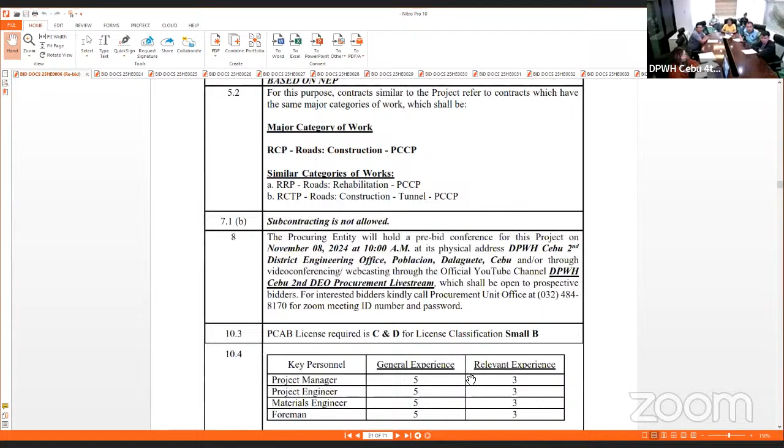And also the requirements of key personnel, general experience and relevant experience. Also the requirements of project engineer in compliance to DO number 118 series of 2024, and also the requirements of accredited materials engineer in compliance to DO number 98 series of 2016.

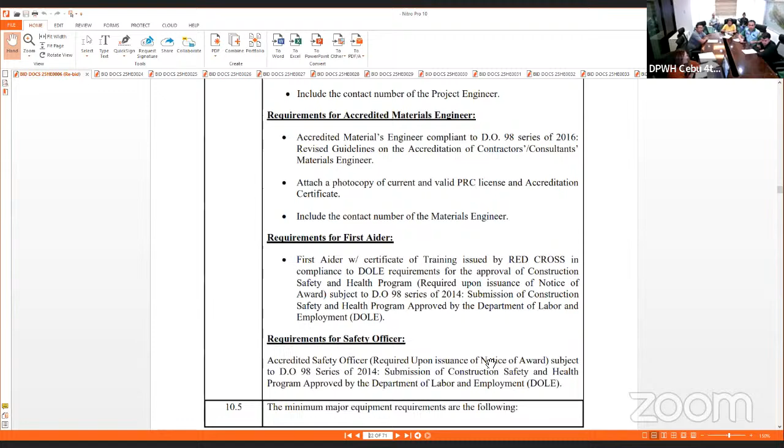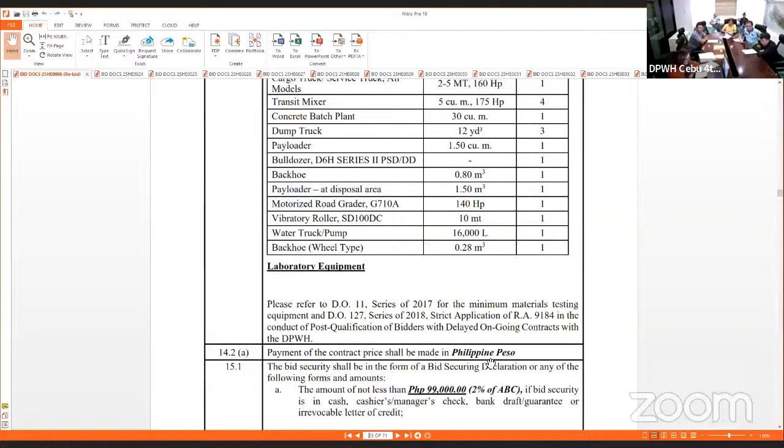Also take note the requirement of equipment, major equipment requirements and its capacity and number of units. Kindly refer to the shared screen.

The bid security shall be in the form of bid securing declaration or any of the following forms and amounts, as shown in the screen. Please refer to the shared screen.

The intended completion date is 32 calendar days, including predetermined unworkable day of 1 day and 4 numbers of Sundays.

For the bill of quantities, kindly refer to the shared screen, please.

For the next contract, ID 25 HE0024, Organizational Outcome 2, Protect Lives and Properties Against Major Floods and Flood Management Program, construction maintenance of flood mitigation structures and drainage systems, construction of Cawayan River flood control structure, Dalaguete, Cebu.

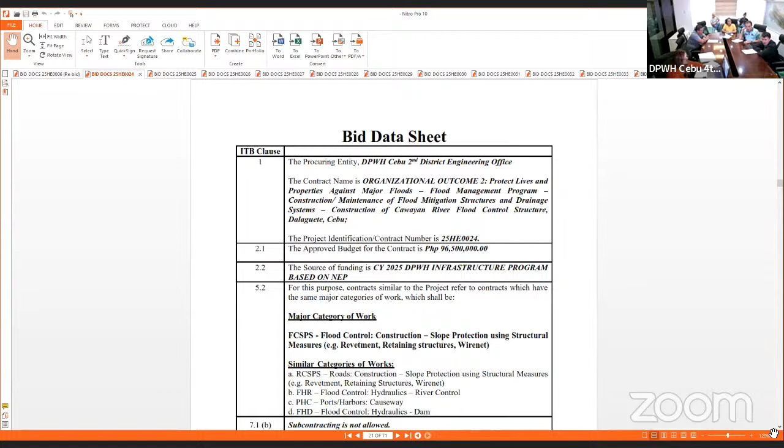For the major categories of work and similar categories of work, kindly refer to the shared screen. And its

key personnel requirements, general experience, and relevant experience. Also the requirement for accredited project engineers in compliance to DO number 118 series of 2024, and the requirement for accredited materials engineer in compliance to DO number 98 series of 2016.

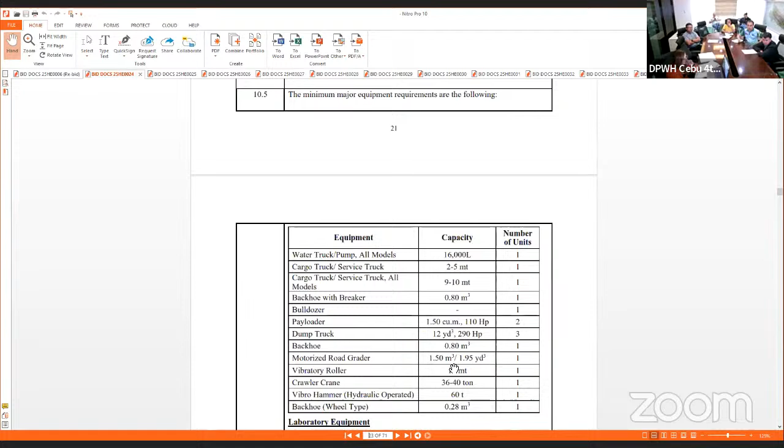Also, the major equipment requirements, capacity, and its number of units can be referred to the shared screen.

The bid security shall be in the form of bid securing declaration or any of the following forms and amounts as shown on the screen. Please refer.

The intended completion date is 288 calendar days, including predetermined unworkable days of 9 calendar days and 36 number of Sundays.

For the bill of quantities, kindly refer to the shared screen.

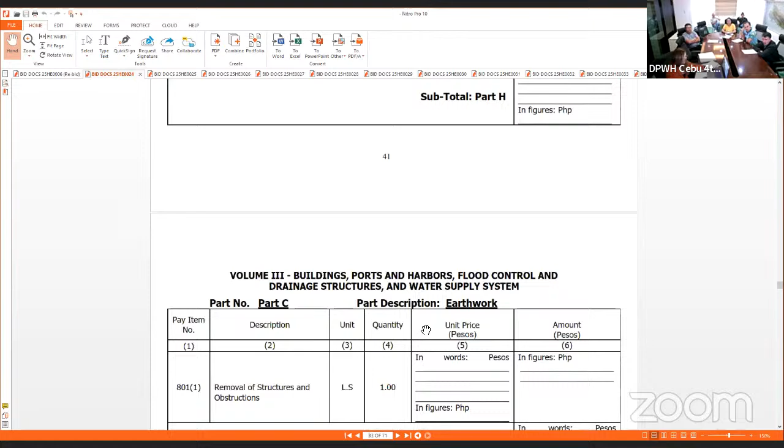For the next contract, 25 HE0025, Convergence and Special Support Program, Basic Infrastructure Program, BIP, Multipurpose Buildings, Facilities to Support Social Services, Construction, Completion of Multipurpose Buildings, Sitio BLISS, Barangay Binlod, Argao, Cebu.

For the major categories of work, similar categories of work, kindly refer to the shared screen.

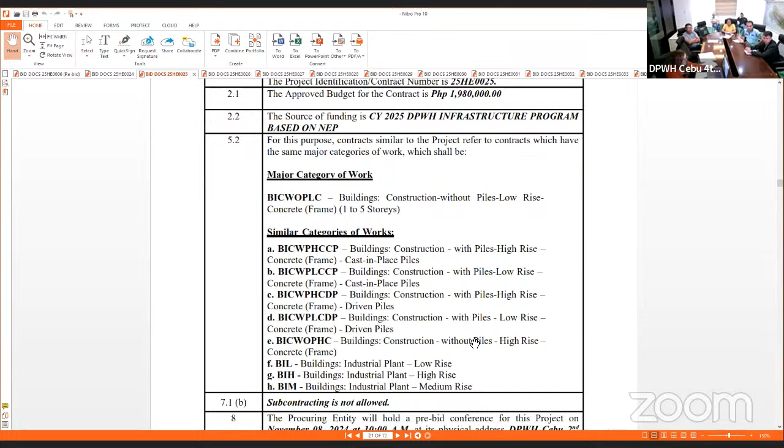The key personnel requirements, general experience, and relevant experience can be referred to the shared screen. The requirement for the accredited project engineer in compliance to DO number 118 series of 2024, and also the requirements for accredited materials engineer in compliance to DO number 98 series of 2016.

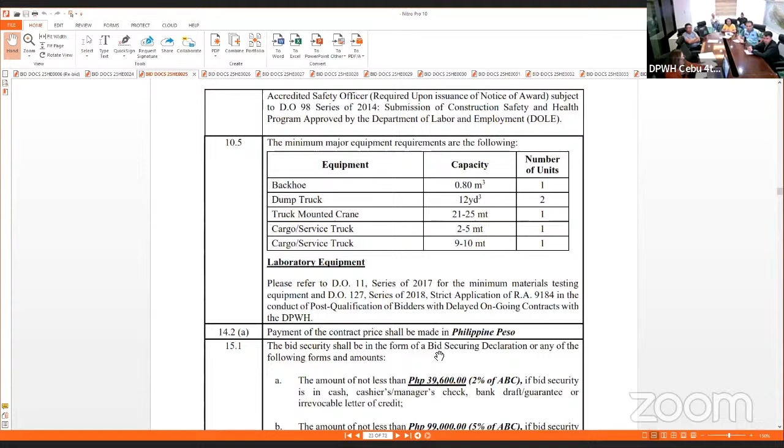Also, the major equipment requirements, capacity, and its number of units can kindly refer to the shared screen.

The bid security shall be in the form of bid securing declaration or any of the following forms and amounts as shown on the screen. Please refer.

The intended completion date is 90 calendar days, including predetermined unworkable days of 3 calendar days and 12 number of Sundays.

For the bill of quantities, kindly refer to the shared screen.

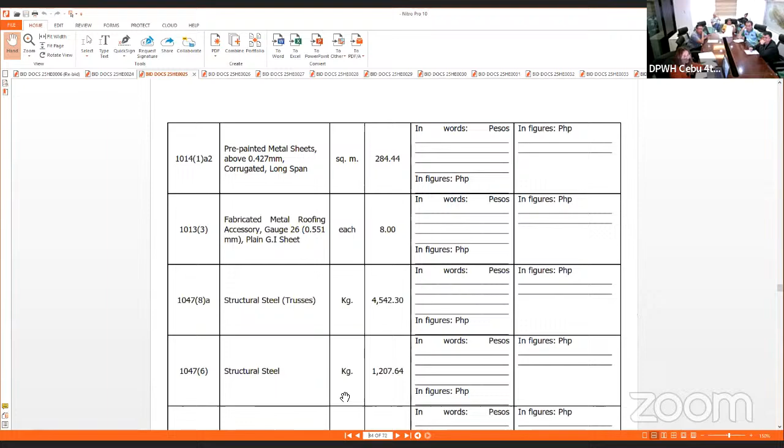For the next contract, 25HE0026, Convergence and Special Support Program, Basic Infrastructure Program, BIP, Multipurpose Buildings, Facilities to support social services, construction and completion of multipurpose building, Barangay Tulang, Argao, Cebu. For the major categories of work and similar categories of work, kindly refer to the shared screen.

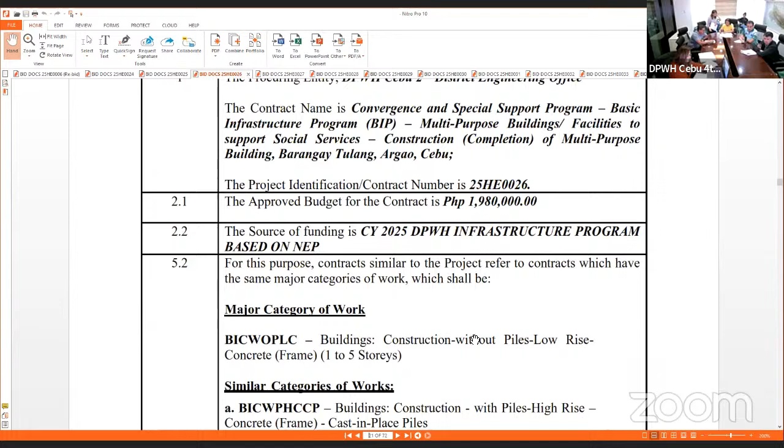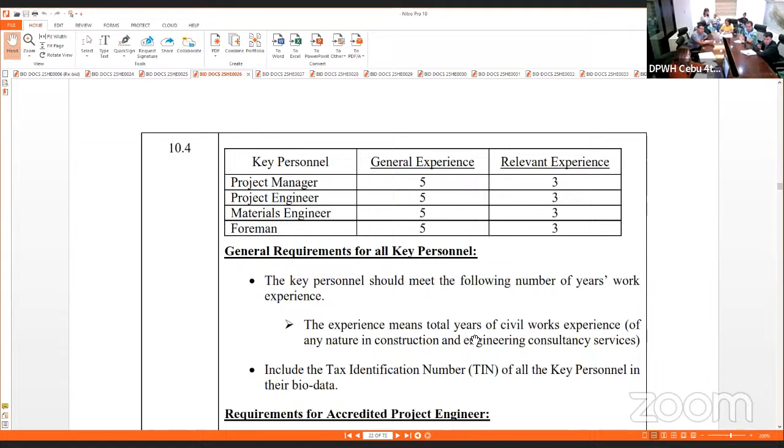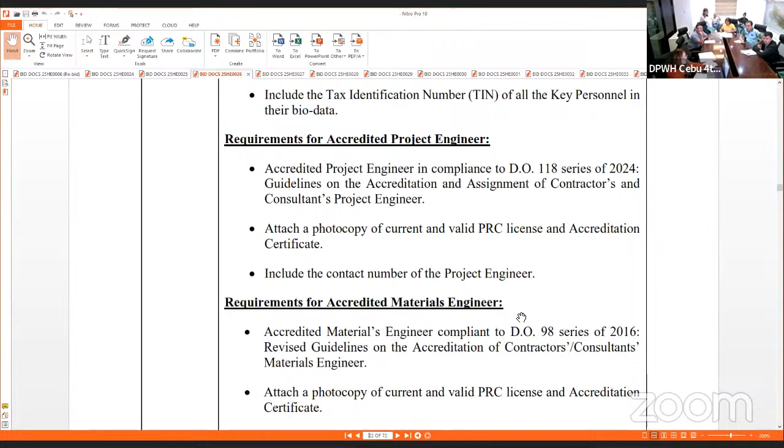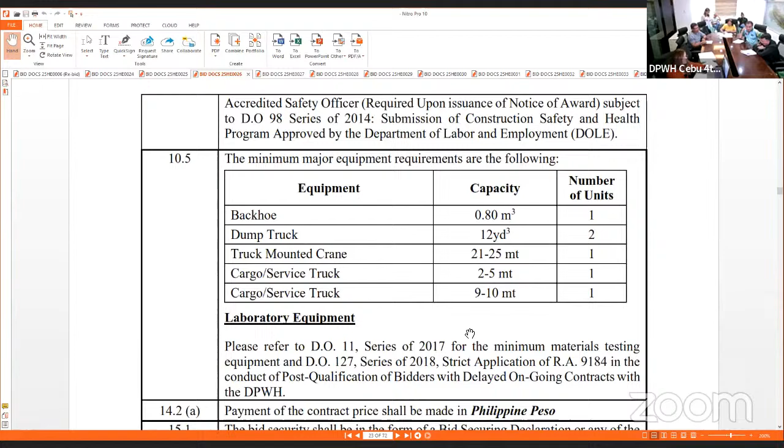For the key personnel requirements, general experience and relevant experience, please refer to the shared screen. Also the requirement of accredited project engineer in compliance to DO number 118 series of 2024, and the requirements for the accredited materials engineer in compliance to DO number 98 series of 2016. Also, the major equipment requirements, capacity, and number of units can be referred to the shared screen.

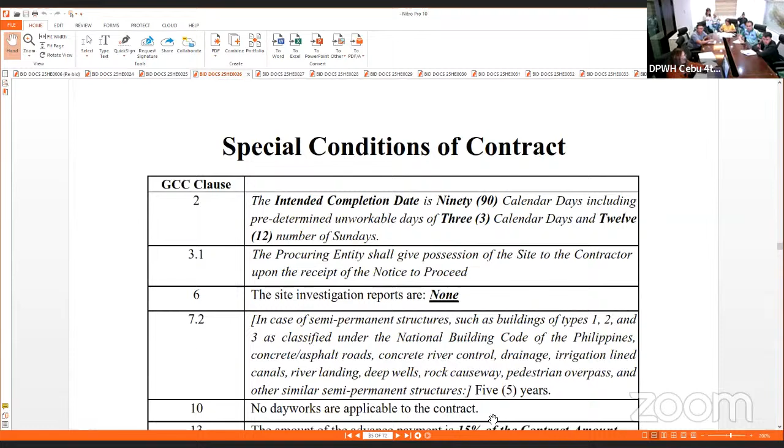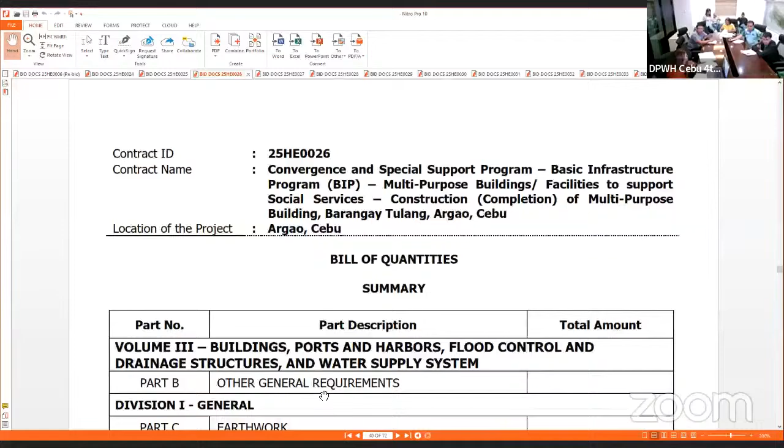The bid security shall be in the form of a bid securing declaration or any of the following forms and amounts as shown on the screen. The intended completion date is 90 calendar days, including predetermined unworkable days of 3 calendar days and 12 Sundays. For the bill of quantities, kindly refer to the shared screen.

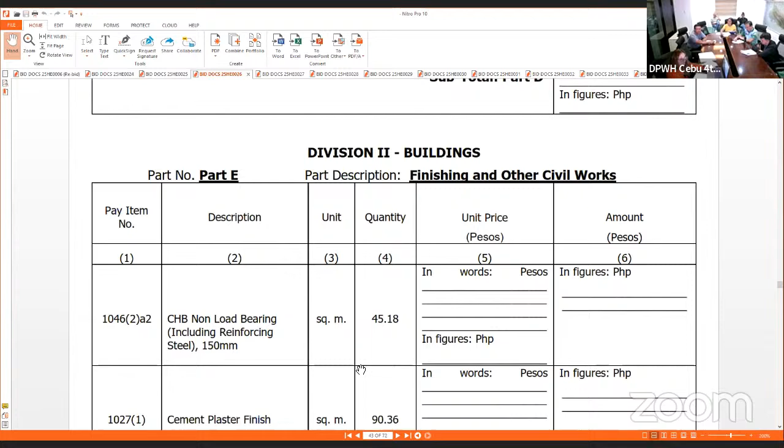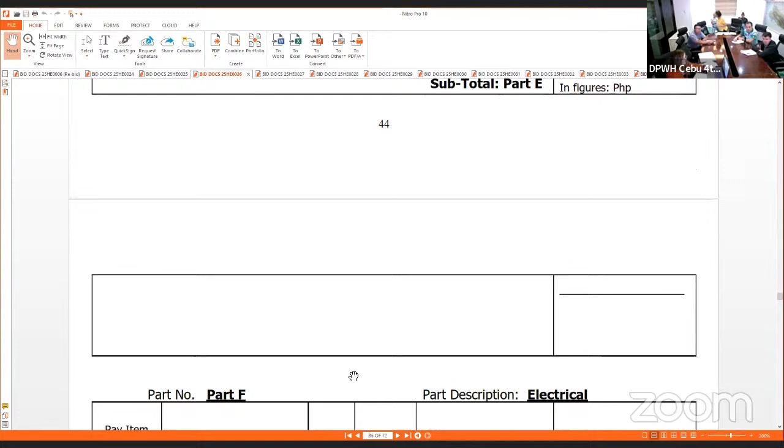For the next contract, ID 25HE0027, Convergence and Special Support Program, Sustainable Infrastructure Projects Alleviating Gaps, SIPAG, Coastal Roads, Causeway for Environmental Protection and Conservation, Construction of Seawall, Barangay Looc, Oslob, Cebu.

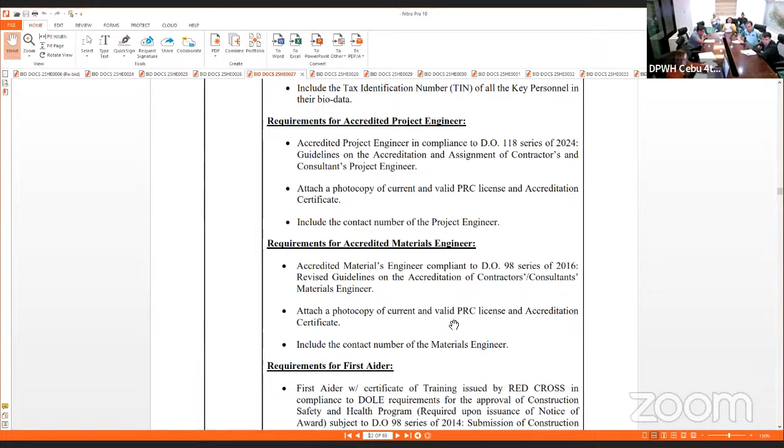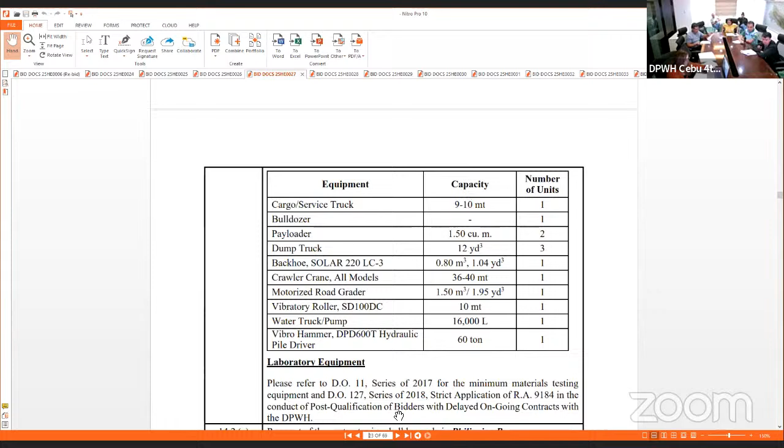For the major categories of work and similar categories of work, kindly refer to the shared screen. And the key personnel requirements, general experience and relative experience, refer to the shared screen. Also, the requirements of accredited project engineer in compliance to DO number 118 series of 2024, and the accredited materials engineer compliant to DO number 98 series of 2016. Also the minimum major equipment requirements, capacity and number of units, refer to the shared screen.

The bid security shall be in the form of a bid securing declaration or any of the following forms and amounts as shown on the screen. The intended completion date is 206 calendar days, including predetermined unworkable days of 6 calendar days and 24 Sundays. For the bill of quantities, kindly refer to the shared screen.

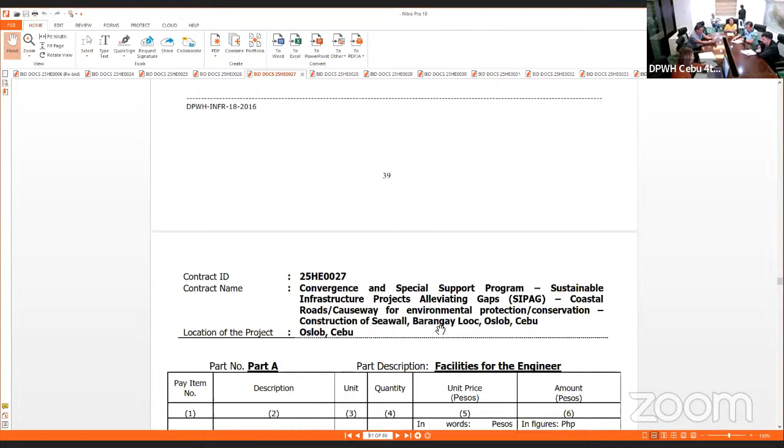Good morning. For the next project, 25HE0028, Convergence and Special Support Program, Sustainable Infrastructure Projects Alleviating Gaps, SIPAG, access roads and or bridges from the national roads leading to major strategic public buildings and facilities, construction of road Sitio Slope to Sitio Cambalagon, Barangay Obao, Argao, Cebu.

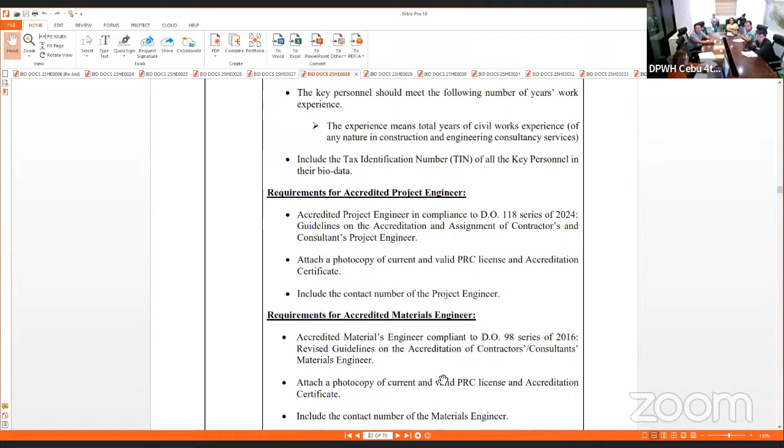For the major category of work and similar categories of works, please refer to the shared screen. And also the key personnel requirements, and the requirements for the accredited project engineer in compliance to DO 118 series of 2024 and the accredited materials engineer in compliance to DO 98 series of 2016.

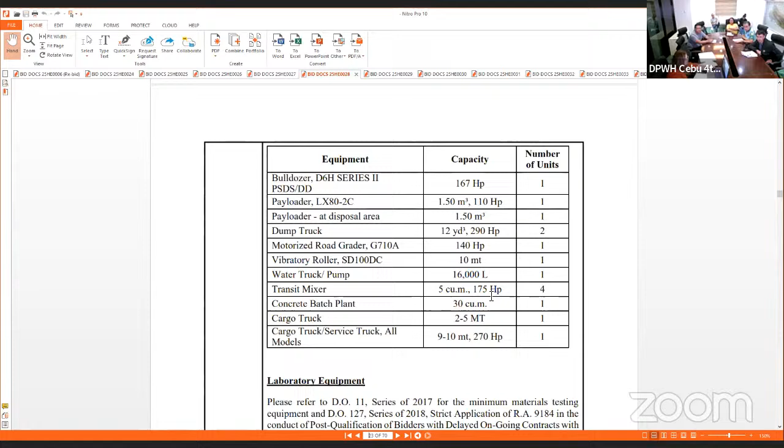Please also take note the minimum major equipment requirements as shown on the screen. The bid security shall be in the form of a bid securing declaration or any of the following forms and amounts as shown on the screen. The intended completion date is 32 calendar days, including predetermined unworkable days of 1 calendar day and 4 Sundays. For the bill of quantities, please refer to the shared screen.

For the next project, 25HE0029, Convergence and Special Support Program, Basic Infrastructure Program BIP, Multipurpose Buildings, Facilities to Support Social Services, Construction and Completion of Multipurpose Building, Barangay Nueva Caceres, Oslob, Cebu.

For the major category of work and similar categories of works, please refer to the shared screen. And also for the key personnel requirements, please take note of the requirements for the accredited project engineer in compliance to DO 118 series of 2024 and accredited materials engineer in compliance to DO 98 series of 2016. Please also take note of the minimum major equipment requirements as shown on the screen.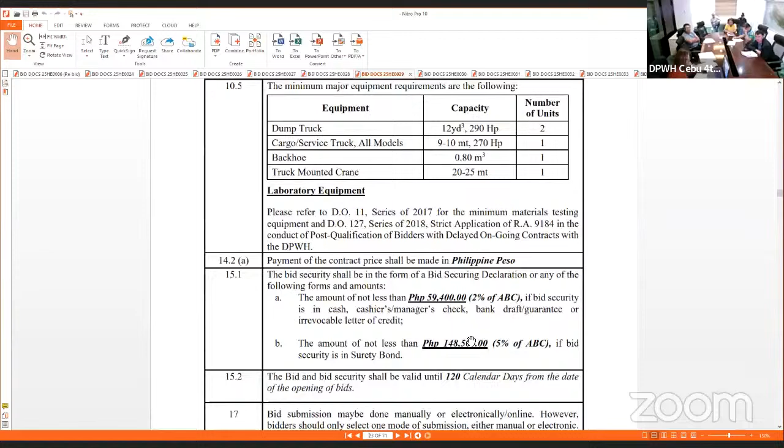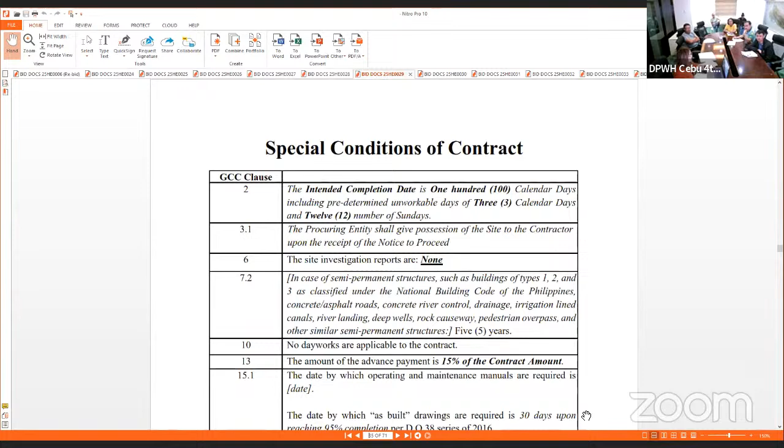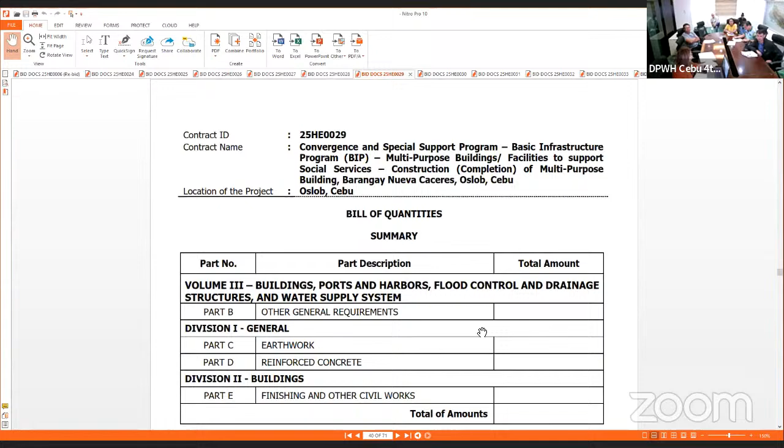The bid security shall be in the form of a bid securing declaration or any of the following forms and amounts as shown on the screen. The intended completion date is 100 calendar days, including predetermined unworkable days of 3 calendar days and 12 Sundays. For the bill of quantities, please refer to the shared screen.

For the next project, contract ID 25HE0030, Convergence and Special Support Program, Basic Infrastructure Program BIP, Multipurpose Buildings, Facilities to Support Social Services, Construction of Multipurpose Buildings, Sitio Payahan, Barangay Bogo, Argao, Cebu.

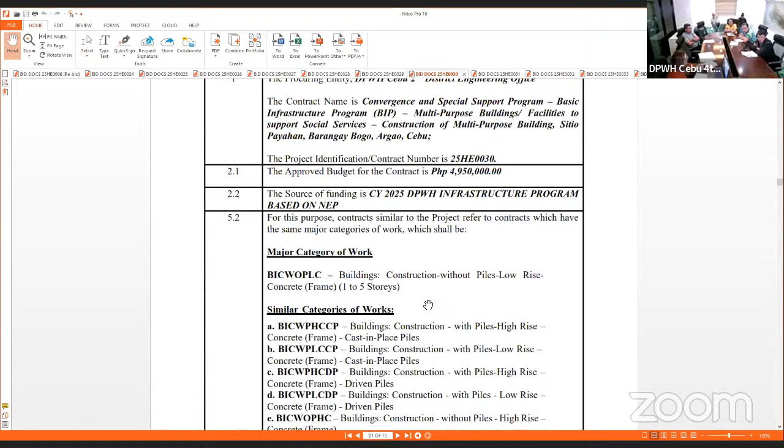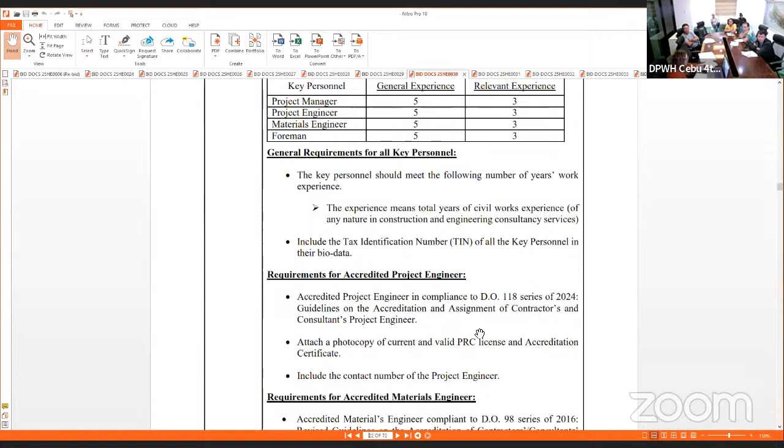For the major category of work and similar categories of works, please refer to the shared screen. And also for the key personnel requirements, please take note about the requirements for the accredited project engineer in compliance to D.O. 118 series of 2024 and for the accredited materials engineer in compliance to D.O. 98 series of 2016. Please also take note the minimum major equipment requirements as shown on the screen.

The bid security shall be in the form of a bid securing declaration or any of the following forms and amounts as shown on the screen. The intended completion date is 120 calendar days, including predetermined unworkable days of 4 calendar days and 16 Sundays. For the bill of quantities, please refer to the shared screen.

For the next project, contract ID 25HE0031, Convergence and Special Support Program, Basic Infrastructure Program BIP, multipurpose buildings, facilities to support social services, construction and completion of multipurpose building, Barangay Butong, Argao, Cebu.

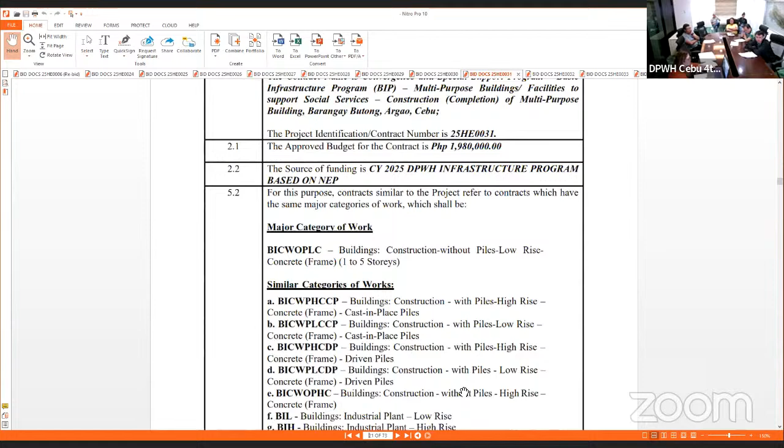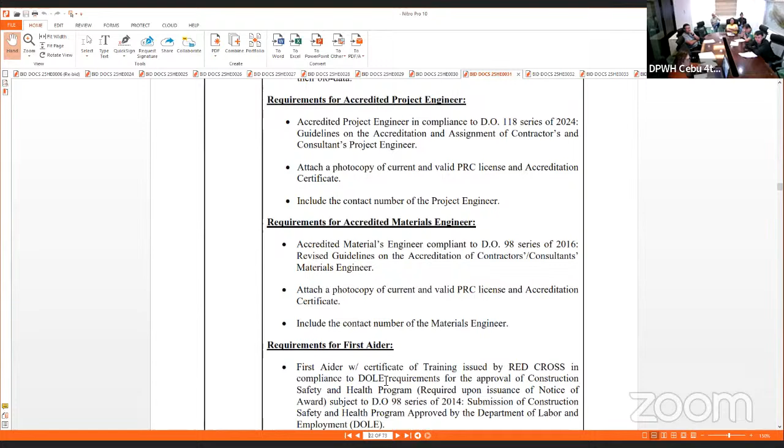For the major category of work and similar categories of works, please refer to the shared screen. And also the key personnel requirements. Please take note about the requirements for the accredited project engineer in compliance to D.O. 118 series of 2024 and the accredited materials engineer in compliance to DO 98 series of 2016. Please also take note the minimum major equipment requirements as shown on the screen.

Then the bid security shall be in the form of a bid securing declaration or any of the following forms and amounts as shown on the screen. The intended completion date is 90 calendar days, including predetermined unworkable days of 3 calendar days and 12 Sundays. For the bill of quantities, please refer to the shared screen.

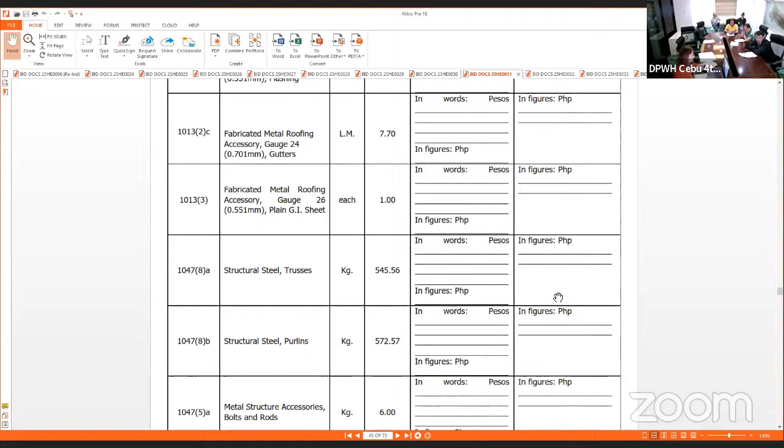For contract ID 25HE0032, Convergence and Special Support Program, Basic Infrastructure Program BIP, Multipurpose Buildings, Facilities to Support Social Services, Construction, Completion of Multipurpose Building, Barangay Anahaw, Argao, Cebu.

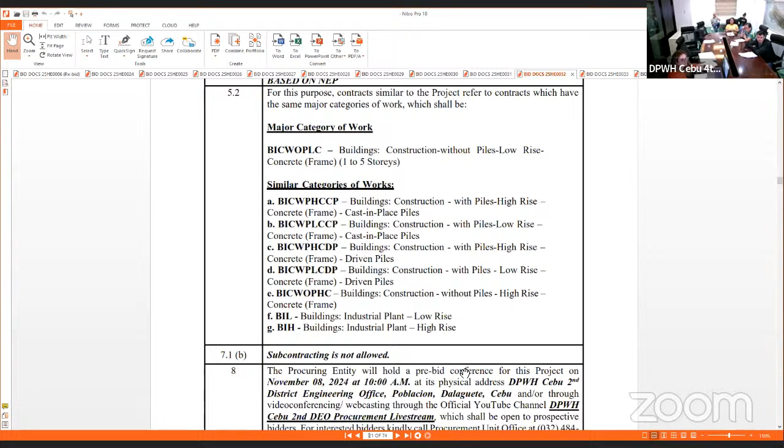For the major category of work and similar categories of works, please refer to the shared screen, and also the key personnel requirements. Please also take note about the requirements for the accredited project engineer in compliance to DO 118 series of 2024 and the accredited materials engineer in compliance to DO 98 series of 2016.

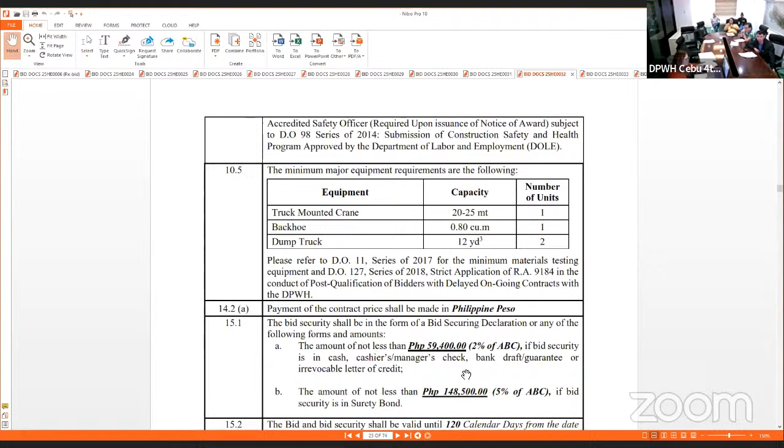Please also take note the minimum major equipment requirements as shown on the screen. The bid security shall be in the form of a bid securing declaration or any of the following forms and amounts as shown on the screen.

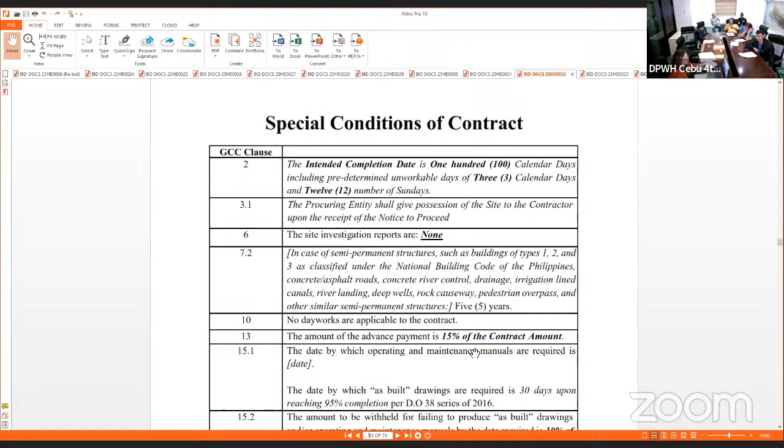The intended completion date is 100 calendar days, including predetermined unworkable days of 3 calendar days and 12 number of Sundays. For the bill of quantities, please refer to the shared screen.

For contract ID 25HE0033, Convergence and Special Support Program, Basic Infrastructure Program BIP, Multipurpose Buildings, Facilities to Support Social Services, Construction, Completion of Multipurpose Building, Barangay Talaytay, Argao, Cebu.

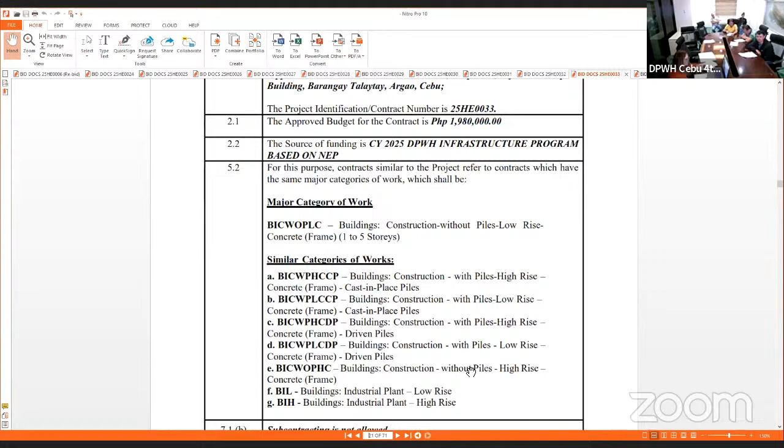For the major category of work and similar categories of works, please refer to the shared screen, and also the key personnel requirements. Please also take note the requirements for the accredited project engineer in compliance to DO 118 series of 2024 and for the accredited materials engineer in compliance to DO 98 series of 2016.

Please also take note the minimum major equipment requirements as shown on the screen. The bid security shall be in the form of a bid securing declaration or any of the following forms and amounts as shown on the screen.

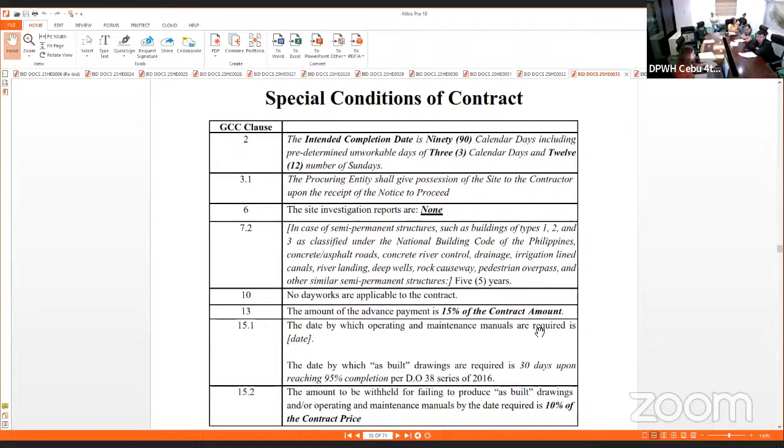The intended completion date is 90 calendar days, including predetermined unworkable days of 3 calendar days and 12 number of Sundays. For the bill of quantities, please refer to the shared screen.

For the bid security shall be in the form of a bid securing declaration or any of the following forms and amounts as shown on the screen.

For the technical specifications, aggregate sub-base, aggregate base course, please refer to the shared screen.

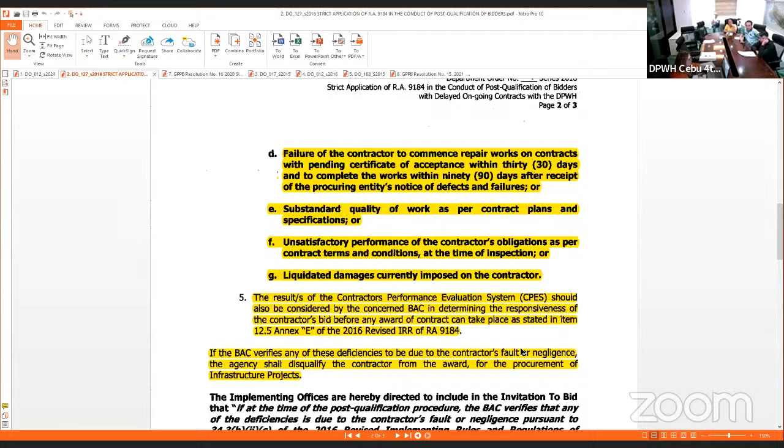C, the failure of the contractor to commence repair works in ongoing contracts within 7 days and to complete them within 30 days after receipt of the procuring entity's notice of defects and deficiencies. Or D, failure of the contractor to commence repair works on contracts with pending certificate of acceptance within 30 days and to complete the works within 90 days after receipt of the procuring entity's notice of defects and failures.

Or E, substandard quality of work as per contract plans and specifications. Or F, unsatisfactory performance of the contractor's obligations as per contract terms and conditions at the time of the inspection. Or G, liquidated damages currently imposed on the contractor.

Number 5, the results of the contractor's performance evaluation system, CPES, should also be considered by the concerned BAC in determining the responsiveness of the contractor's bid before any award of the contract can take place, as stated in item 12.5, Annex E of the 2016 Revised IRR of RA 9184.

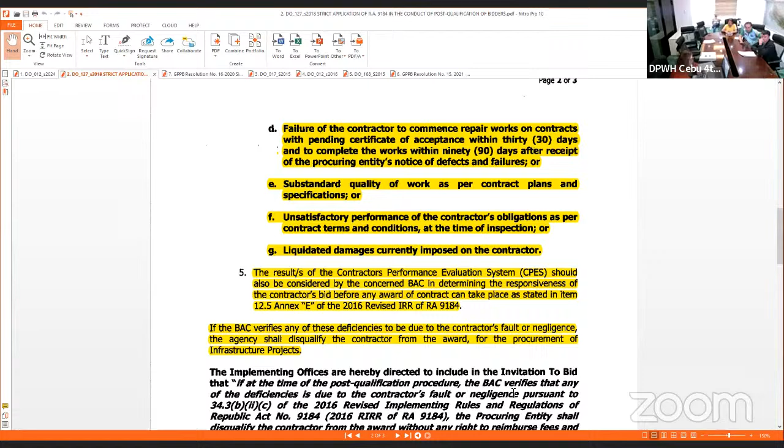If the BAC verifies any of these deficiencies to be due to the contractor's fault or negligence, the agency shall disqualify the contractor from the award of the procurement of infrastructure projects.

Signed, Mark Villar, former secretary.

Department Order number 17, series of 2015: 3-strike policy in the procurement of contracts for infrastructure works, goods, and consulting services. To further strengthen the integrity of the competitive bidding process, the following instructions are hereby issued pertaining to the implementation of the 3-strike policy of the DPWH against violations of section 69.1.I of the implementing rules and regulations of RA 9184.

The violations enumerated in DO number 35, which are considered acts that tend to defeat the purpose of public bidding under the 3-strike policy, are hereby amended to read as follows: A, a bidder that had purchased bidding documents but subsequently withdrawn from the bidding, or B, submitted a letter of non-participation, or C, did not submit a bid without a valid cause as determined by the Bids and Awards Committee concerned.

A bidder submitting a late bid without a valid cause as determined by the BAC concerned. C, a bidder submitting insufficient or defective documents such as insufficient bid securities and other deficiencies. D, other acts that tend to defeat the purpose of public bidding as determined by the concerned BAC, provided that these acts had been indicated or discussed in the instructions to bidders, bid bulletins, notices, minutes of pre-bid conference, or other similar instruments.

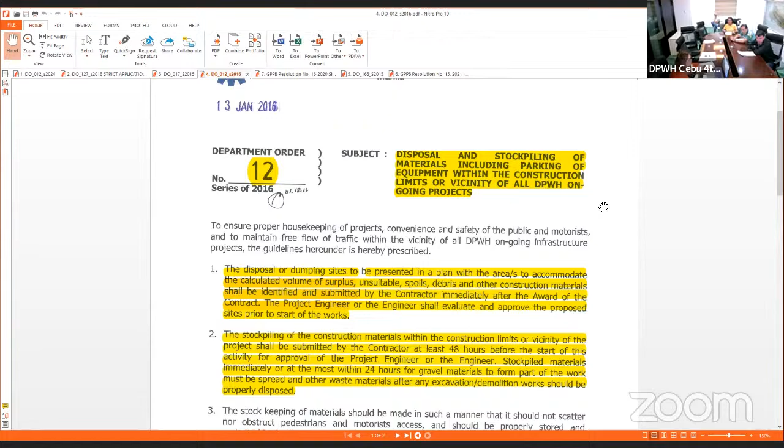Next, Department Order DO 12, series of 2016: Disposal and stockpiling of materials, including parking equipment, within the construction limits or vicinity of all DPWH ongoing projects. The disposal or dumping sites to be presented in a plan with the areas to accommodate the calculated volume of surplus, unsuitable, spoils, debris, and other construction materials shall be identified and submitted by the contractor immediately after the award of the contract. The project engineer or the engineer shall evaluate and approve the proposed sites prior to the start of works.

Stockpiling of construction materials within the construction limits or vicinity of the project shall be submitted by the contractor at least 48 hours before the start of activity, for approval of the project engineer or the engineer. Stockpile materials immediately, or at the most within 24 hours for gravel materials to form part of the work, must be spread, and other waste materials after any excavation or demolition work should be properly disposed.

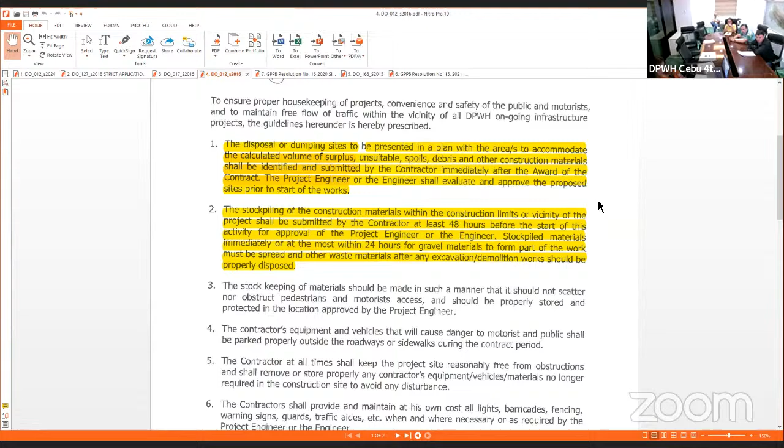Signed by Rogelio L. Singson, Secretary.

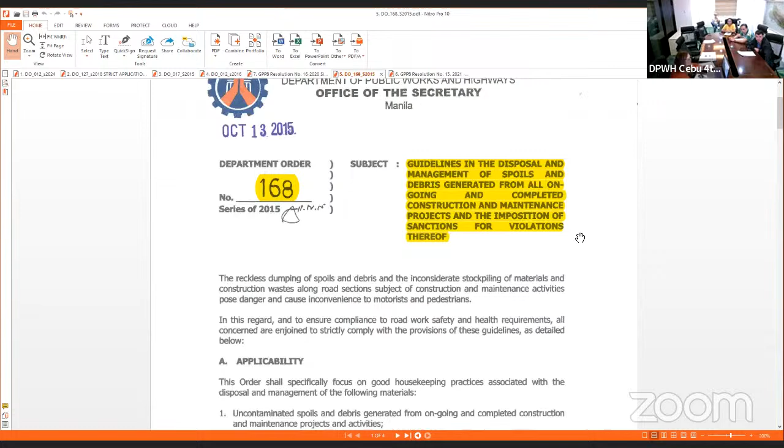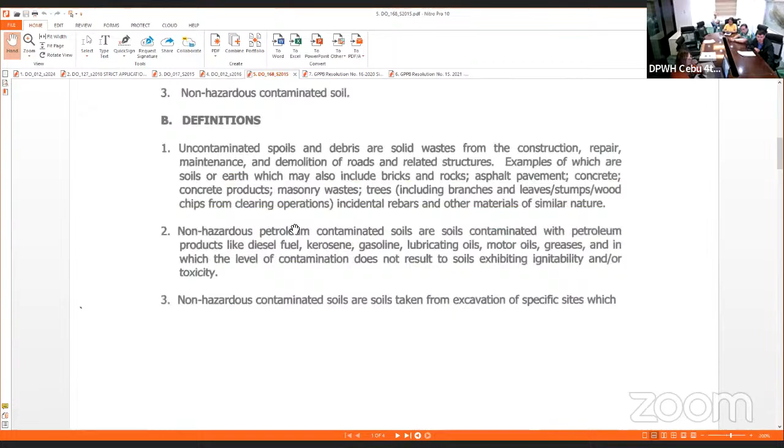Another Department Order, DO 168, series of 2015: Guidelines in the Disposal and Management of Spoils and Debris generated from all ongoing and completed construction and maintenance projects, and imposition of sanctions for violations thereof. Please refer to the shared screen. Signed, Rogelio L. Singson, Secretary.

Please also take note of GPPB Resolution number 15-2021, lifting the suspension on the implementation of the mandatory submission of PhilGEPS certificate of platinum registration and membership in competitive bidding and limited source bidding, amending sections 8.5.2, 23.1.8.2, 23.3, 24.1.8.2, 24.4.3, 34.3, and 54.6 of the 2016 revised IRR of RA 9184, items 4G1 and 5D1B, as well as Appendix A of Annex H thereof, items 4 and 6 of the guidelines for the use of the Government of the Philippines Official Merchants Registry, and item 1 of sections 8 and 9 of the 6th edition of the Philippine Bidding Documents for Goods and Infrastructure Projects.

Our last topic is GPPB Resolution number 16-2020, approving the circular on the guidelines in the preparation of the simplified Philippine bidding documents for goods and infrastructure projects and submission of the required forms for the procurement of goods, infrastructure projects, and consulting services, with related amendments to the 2016 revised implementing rules and regulations of Republic Act number 9184.